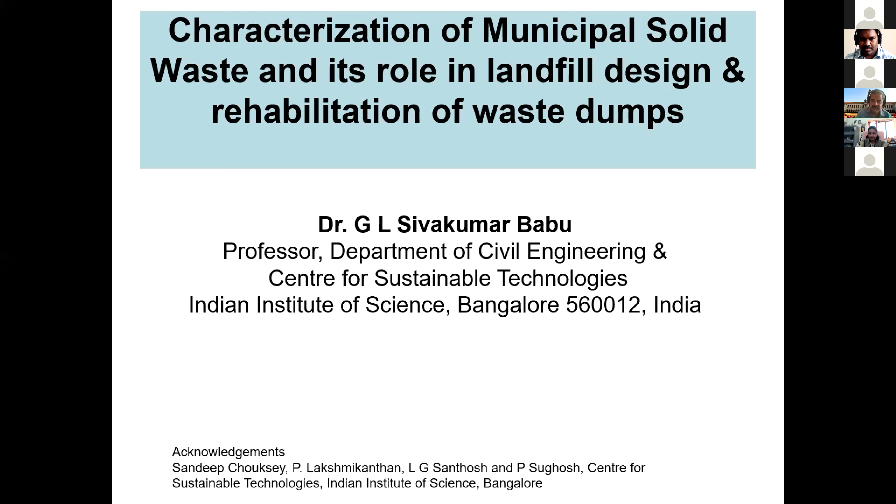I will be talking about characterization of municipal solid waste and its role in landfill design. Of course, we don't have any landfills in India; a lot of dumps we have. So we really need to use this knowledge in the rehabilitation of dump sites. We have been working for quite some time on this. We have the contributions from Sandeep Chouksey, then Lakshmikanthan, then Dr. Santhosh, Dr. Sughosh, and others. I just want to talk about the importance of the topic, then the state of practice, perspectives, and all of that. If you look at the Government of India guidelines.

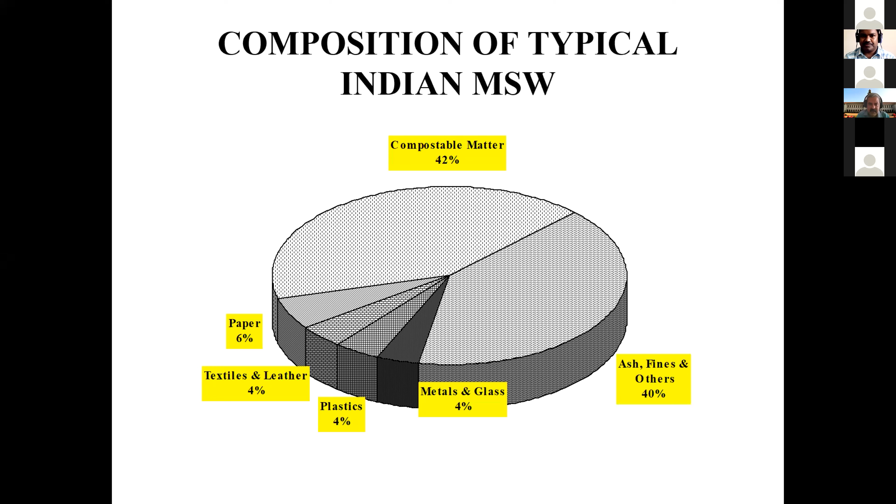So thank you, sir. Yeah, so if you look at the composition of the solid waste that is given in some of the documents, the waste characteristics are completely different in India from any other country. Compostable matter is about 42%, and paper, textiles, ash and fines and others. You get this number, but actually we are trying to look at the data that we have in Bangalore. So the numbers are similar. Say, for example, the biodegradable waste is in the same range, and even others are there.

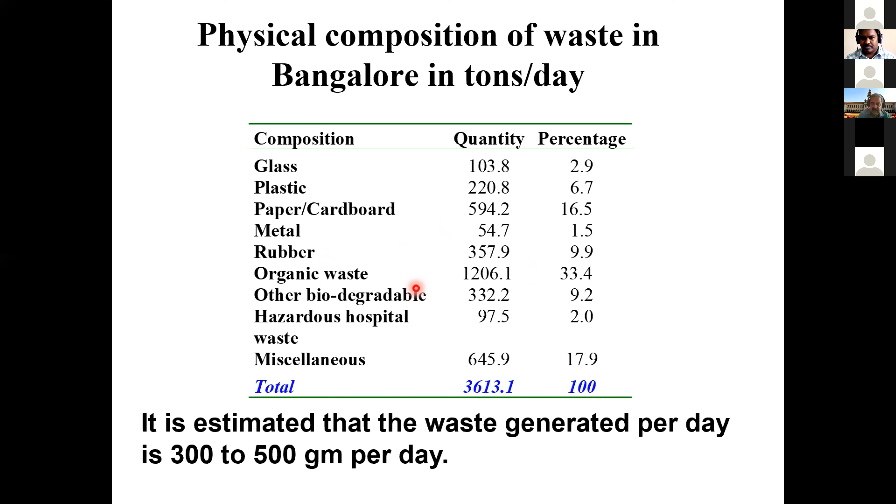There could be some variations, and we also know that there could be about 300 to 500 grams per person per day. This is one number that we need to know for the estimation of landfill capacities.

I was just looking at the Government of India statistics, which says that you have a lot of waste generated, and many people are tending to migrate to cities. According to the Pollution Control Board, more than 1 lakh tons of waste per day is generated, and of course they say about 100 grams per person per day, and the efficiency of the processing is quite low. That's what I see most of the time.

And that way, what is supposed to be treated in landfills is actually dumped elsewhere in the cities or villages, or even outskirts of the towns and villages. And it leads to quality of life being very poor. And some of these important aspects like source segregation and collection are not really okay.

And Bangalore generates quite high. In fact, now it is about nearly 6,000 tons per day. And the collection efficiency is also not great. I mean, I'm seeing the way that they do.

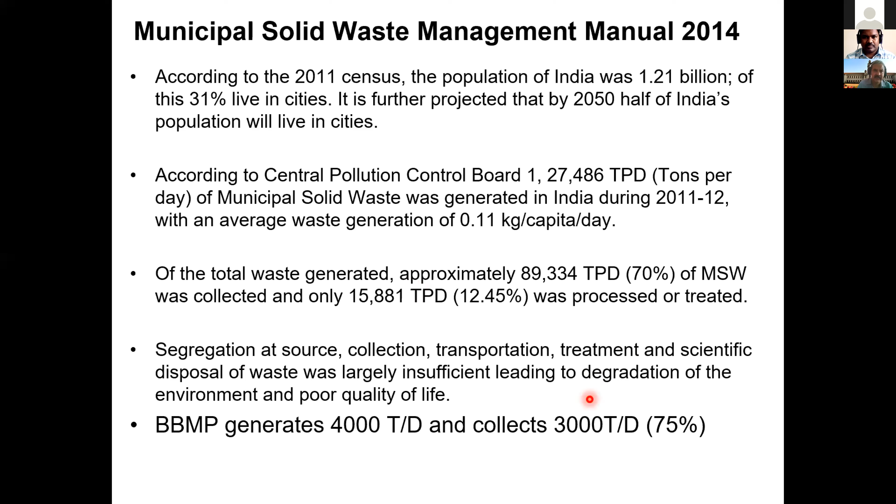And if you look at the municipal solid waste guidelines that the Government of India has, it talks about all of these options, like source reduction and reuse, recycling, composting, because we have a lot of organic matter, and we also talk about waste to energy plants and all of that,

and landfills. So though we say that the landfills are the least preferred, since the first two, source reduction and all of this, are not really very good, everything goes to landfills. But then we don't have landfills, we have dump sites. So that is a very sad part of it.

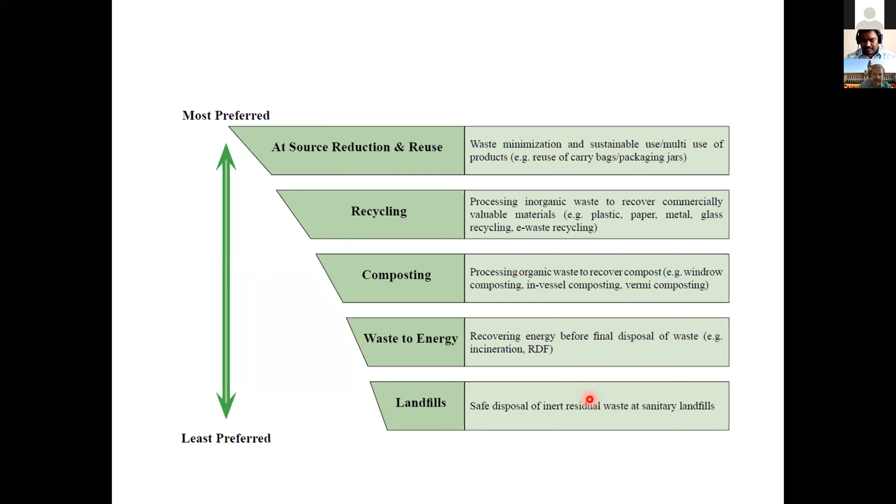Of course, we know that landfills are very useful because we'd like to store the waste in landfills, and we'd like to minimize the impact of the solid waste, because it has a lot of leachate and it has methane generation potential. So we'd like to isolate the waste through containment, and eliminate the pathways of pollution, for example, air pollution and water pollution.

And the landfills also enable the controlled collection and treatment of products of physical, chemical, and biological changes within a dump, both liquids and gases. And why do we do that? We would like to see that all the environmental processes, like the degradation of waste and leachate generation, become stable. Whatever you want to do to treat them is okay, but at least the whole operation is stable.

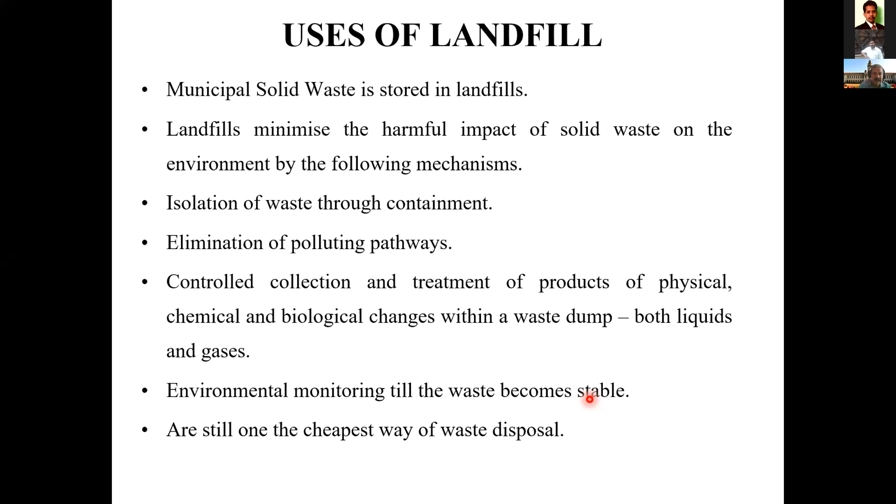And it is supposed to be one of the cheapest ways, definitely, because nowadays at Government of India level, people are talking about so many technologies. When you talk about landfill configurations, this is if you really start from zero, but unfortunately we don't have those conditions. Maybe in some towns they still can do that.

So you have area fill, where you try to treat the surface in a proper way and then construct an area fill, or sometimes above ground or below ground, depending on the geological conditions. If the water table is deep, you can go somewhat deeper, but if the water table is somewhat high, say 7 or 10 meters, you can't really go to that, so you can go a bit down and then go up. So this is like above and below.

And of course, valley fills, this is what we have in Bangalore. This is a big problem here. Nowadays a lot of quarry sites are there in some places, and they are placing the waste down in these sites. But the technology of landfilling in valley sites is very, very complicated. It could lead to a lot of problems of leachate treatment and all of that.

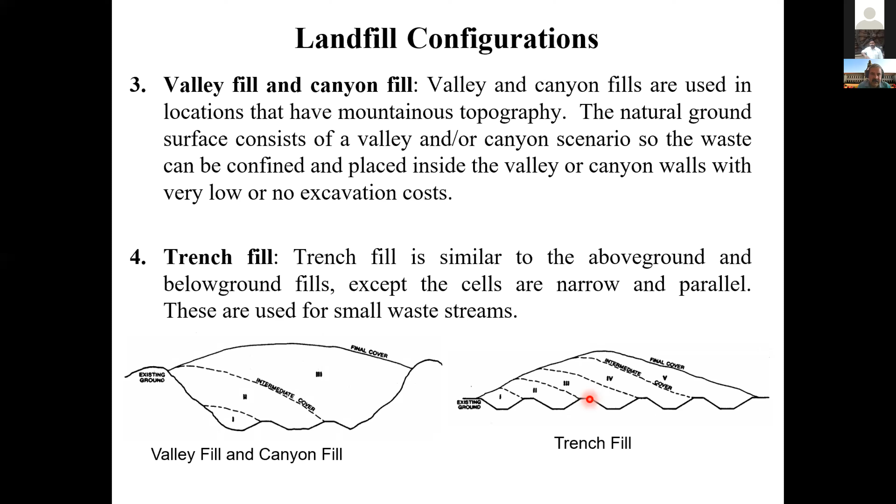And trench filling is also there. So there are some options. But then it basically comes down to geological considerations, the quantity of waste, economics, and so many other things, the politics as well.

So if you look at a plan, the way that we design the landfill would be that suppose you have maybe 8,000 tons per day in Mumbai, or 6,000 tons per day in Bangalore, and we need to have a design of say 15, 20, 30 years or something.

The higher the life, the better for us, because we don't need to worry about where to place them. So you can even put it in the plan view, where you can just phase out the waste collection. Initially you need to acquire the complete site and then start with phases, where phase one could last for a few years, 3-4 years, and like that you need to control operations.

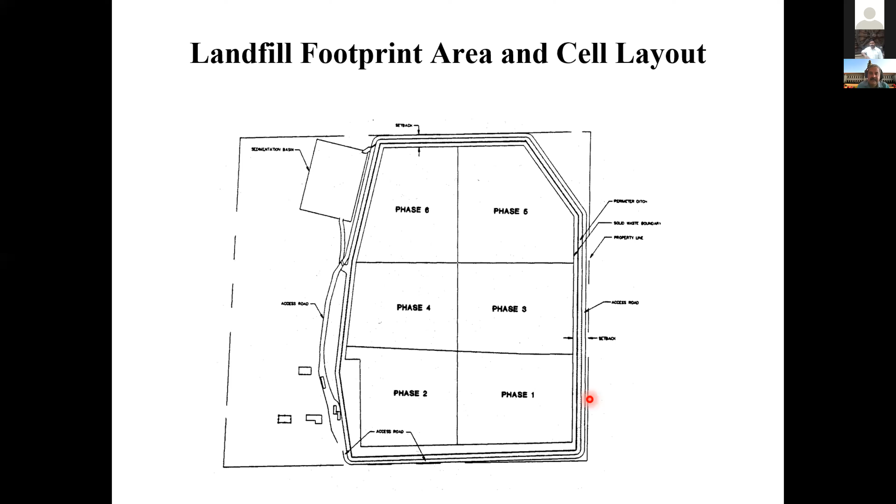As I was just mentioning, landfilling is a controlled operation. You need to understand what goes in and what goes out. That is, in a way, some understanding. But in India, we don't have that. People simply come and dump. They don't have any scientific understanding of the whole thing, including the government units.

So, of course, we have a liner system at the bottom, because we don't want this material to be in contact with the native soil. So you put a clay liner, then the geomembrane, a leachate collection system, and all of that. I think you have nice lectures on the design of liners, and you also have covers: once it is completed, you need different types of covers, like daily cover, intermediate cover, and final cover.

So you need to look at waste, and then you need to have an infiltration layer; this is a basic thing. But definitely you need geotextiles or other better materials. For example, in the cover material itself, there are so many options, and I think Professor Reddy or Professor BNS would be talking about how to reduce the methane gases going out of this cover. Even the current guidelines of the Government of India do not really address these issues of methane migration.

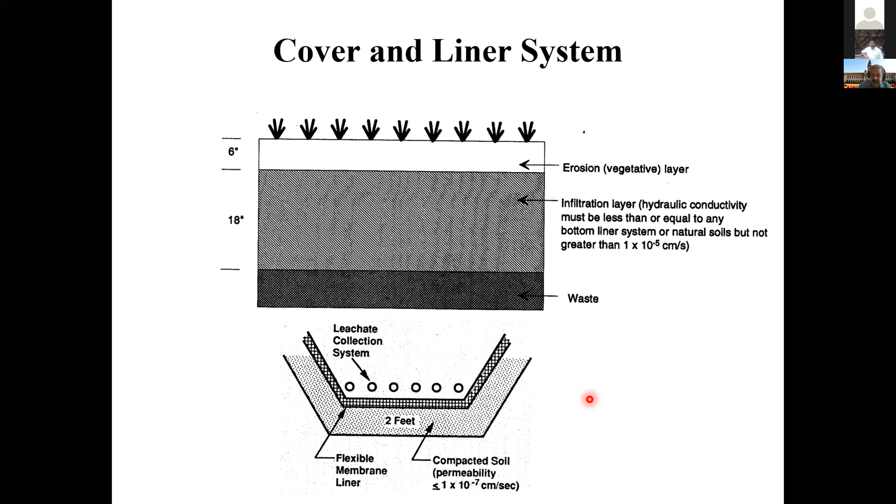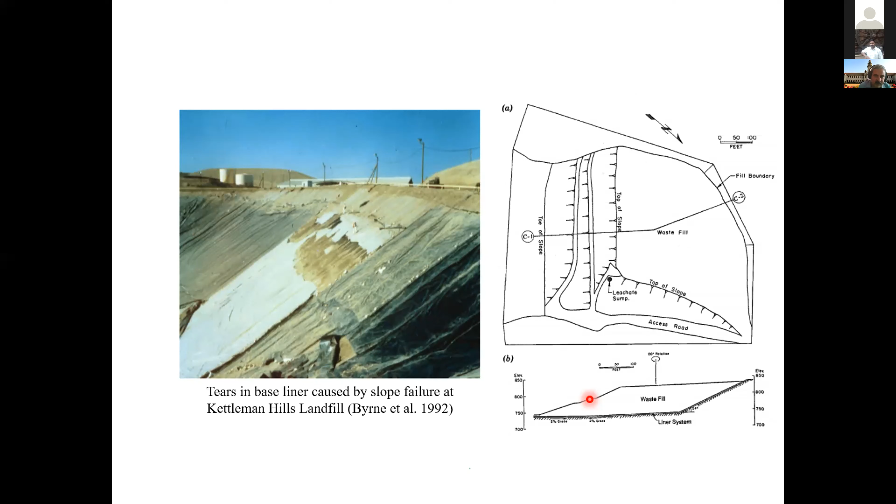And I should also tell you that in India the landfill system itself is a flop, a total failure, and nobody studied it. Only 3 or 4 people like Professor BNS, a few like me, are trying to work on it. The kind of disasters that we have in India with landfill dumping are a total failure of the system. It needs big forensic engineering itself. I've been seeing these failures in India, particularly in Bangalore, but I'm just putting some international photos.

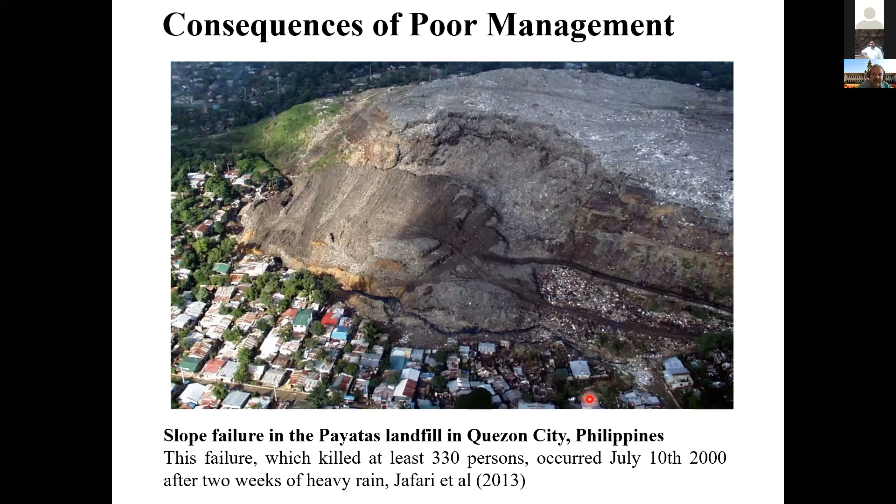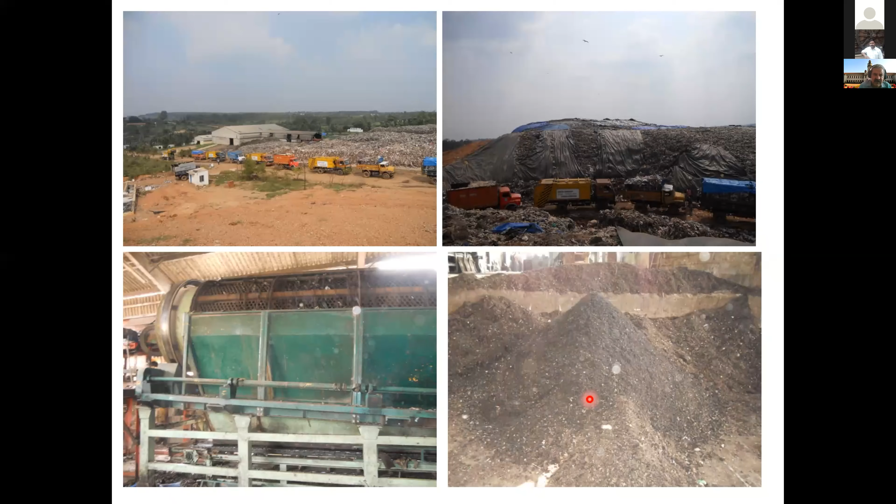Some time back, I was giving a lecture to Bangalore engineers, and I showed them that there was a dump failure in Mangalore recently, maybe 2 years back. You can see some of the officers walking around. This is the Pachanady dumping site. You can see a lot of methane gas, and it is in a green area. This is the way it failed. After extensive rains in August, just 2 years back, it started sliding. About 9 lakh tons of waste was there, and it caused damage of about 9 acres.

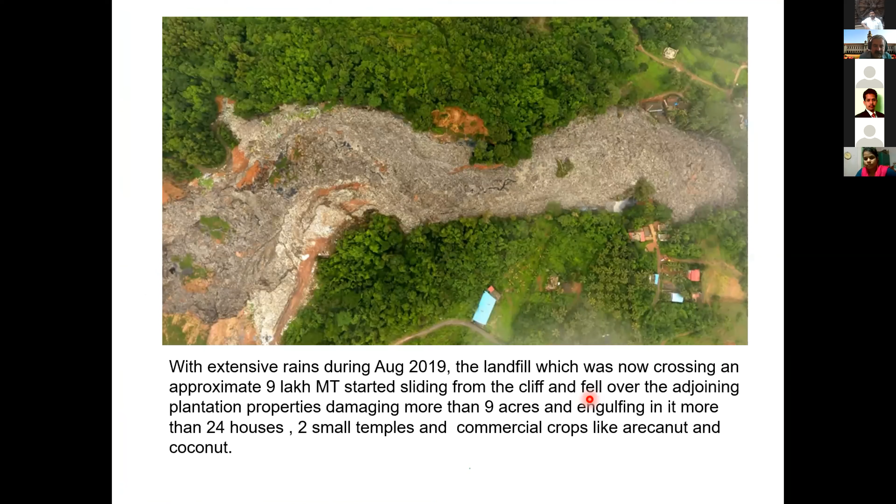And it has so many problems. It led to so many issues and all of that. This is supposed to be in a place which is supposed to be very good in engineering, and you can see a lot of green areas around it. And of course in Bangalore, in Delhi, we have this Ghazipur dump site. Of course in Mumbai you have many. I think Professor BNS will speak about that.

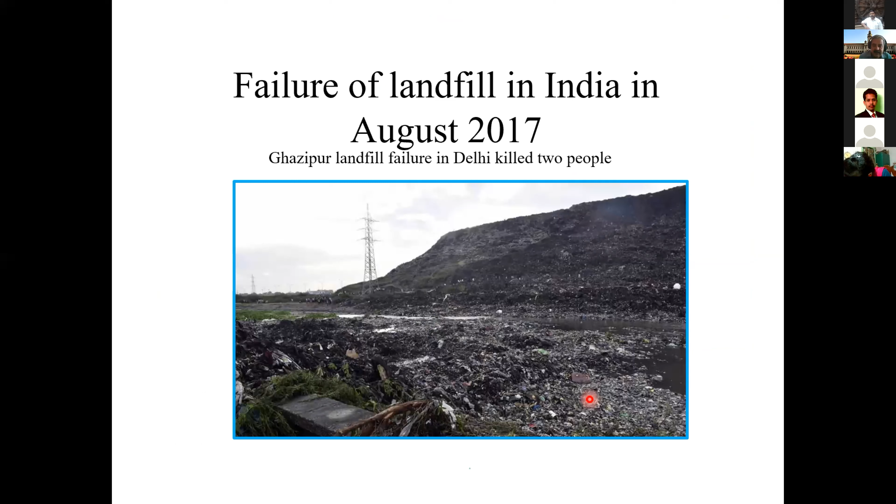So what are the issues in landfills? I think there are a number of issues that we can handle. Identification of landfill sites itself. Like, if you identify a particular site, given that the site is problematic, what is the way that it can work around? So there are a lot of issues here. One can look at this identification of land, assessment of capacities, because it should be cost effective. So assessment of capacity is very important. Estimation of waste characteristics is very important.

It's like you admit a patient in a hospital. Let me tell you, all these landfills are ICUs for all our waste. So you must characterize this waste in a proper way, then you can understand it properly. Because now since you're trying to have this containment system like liner, cover, and all of that, how well it behaves is a function of the waste characteristics. Then you have a lot of methane gas generated in the landfills, because particularly you have a lot of biodegradable waste, to the extent of 40 to 50%. So then how do you do that?

Then the role of geosynthetic materials is very important, because I have seen a lot of places, you have some 20 acres and they bring virgin soil, and then it is like waste plus soil. I find that the way they do compaction is so bad, and the native soil is used so much. Best is to use products like geosynthetic materials, which can minimize the use of natural materials. Remediation of sites is very important. This is very, very critical in our country, because there are so many landfill sites that are leading to a lot of contamination.

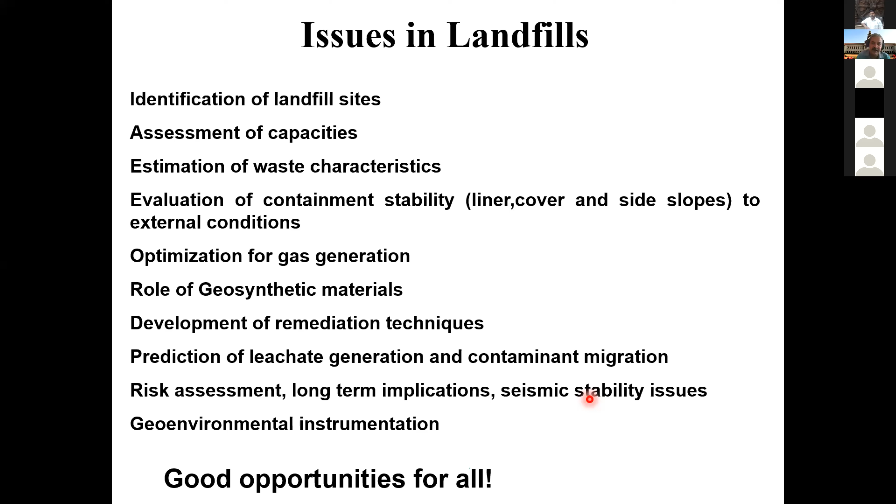Okay, so what are the physical factors? There are a lot of processes in municipal solid waste that happen because of biodegradation. We have physical and mechanical processes, because it's a highly heterogeneous particulate material: there'll be reorientation of particles, movement of fine particles into larger voids, and collapse of void spaces. And chemical processes, like oxidation and all of that.

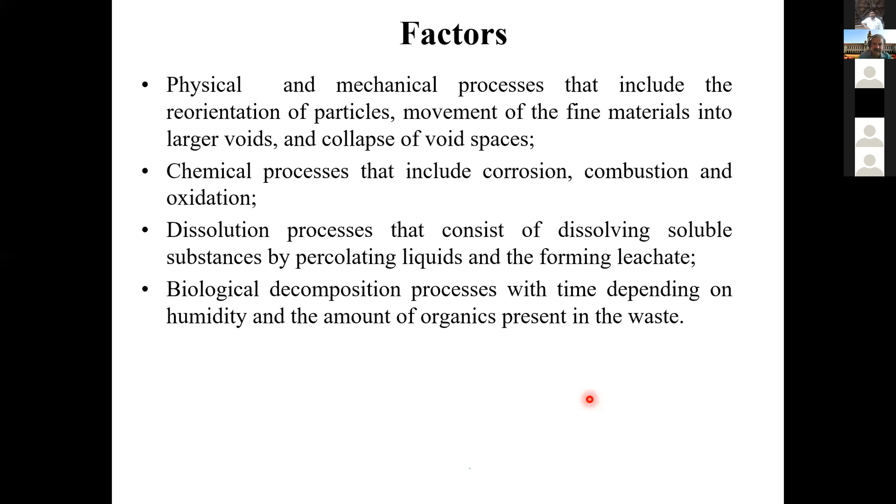Dissolution processes, because all of the chemistry is happening here. Then biological processes. There are so many processes: mechanical processes, chemical processes, biological, all of them very complex. And as civil engineers, we know about steel and concrete a bit, but then soil mechanics, we do two subjects. We talk about a three-phase diagram, and people get some marks out of it.

Many people don't like geotechnical or soil mechanics. They quit it. They go become structural engineers or whatever, right? Everybody wants to be in infrastructure, but you should understand that this is a big market here. There's a lot of opportunities, and what we are really looking at in landfills is much more complicated. Instead of the air, you have methane here.

Okay, who is that? You can ask him to stop.

Yeah, okay. So instead of the water, you have leachate, and you have biological material. In fact, there are a lot of biosolids, which have a lot of bacteria on the surfaces. So you're handling something very, very complex. What we studied as a three-phase material or continuum is no more valid, and it's a very complicated interactive system of physical, chemical, biological, all of these things. So it's a biogeo interface, people call it. Maybe others will talk about this.

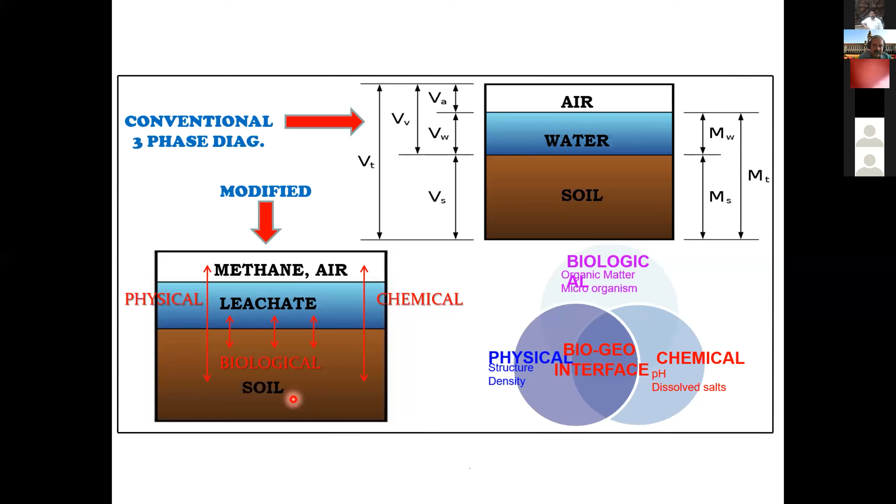When it comes to measuring these properties, what are the things that you need? You need to go for the physical composition, essentially the composition of the waste itself, by mechanical or hand sorting or whatever can be done. And you need to find out the moisture content and organic content. These are some basic things that we do. This basic characterization is also required in trying to adopt recycling options. If you know the composition characteristics very well, it is possible.

I have seen in the government of India, they just give some numbers, then the estimates are prepared based on those numbers. But it takes maybe a day, or a few hours, to actually look at composition and then give proper answers. I've been looking at a lot of the quotations and work orders. The estimates are prepared without even doing the basic testing, basic composition analysis. That is so bad in the country. So my submission would be that you should alert your colleagues in the environmental engineering departments that they should do the basic characterization of what type of materials it has and what type of recycling options we have. Something has to be decided.

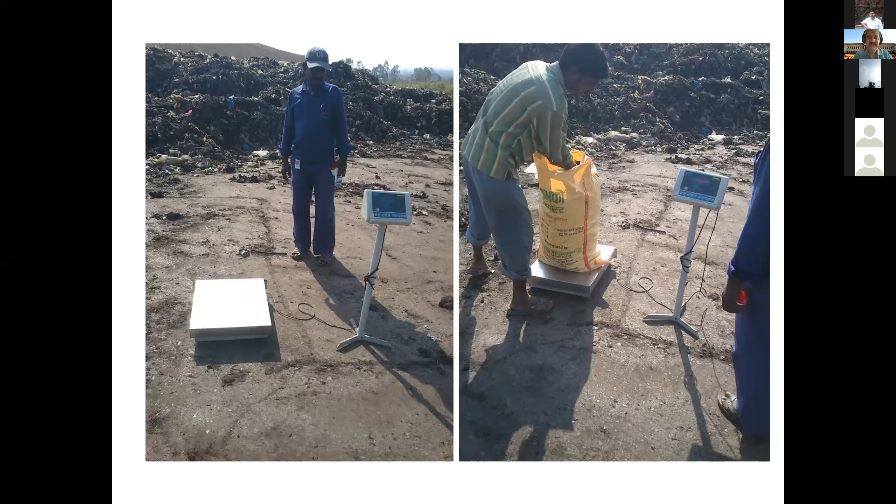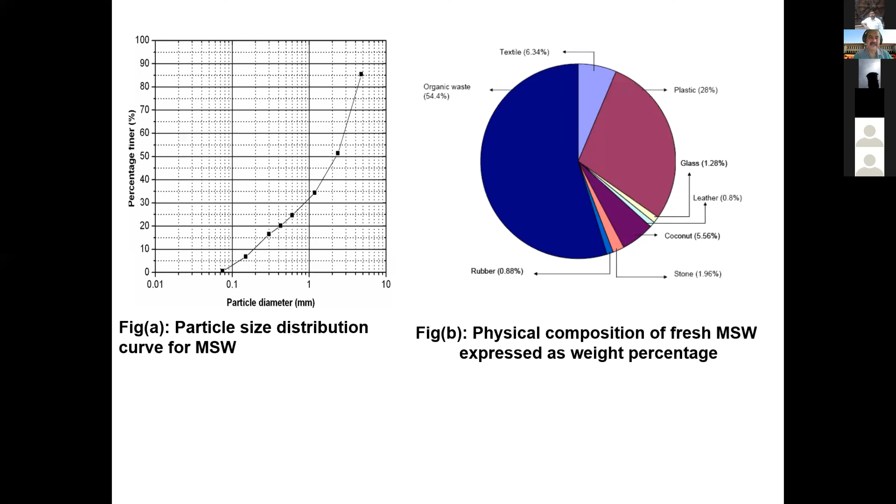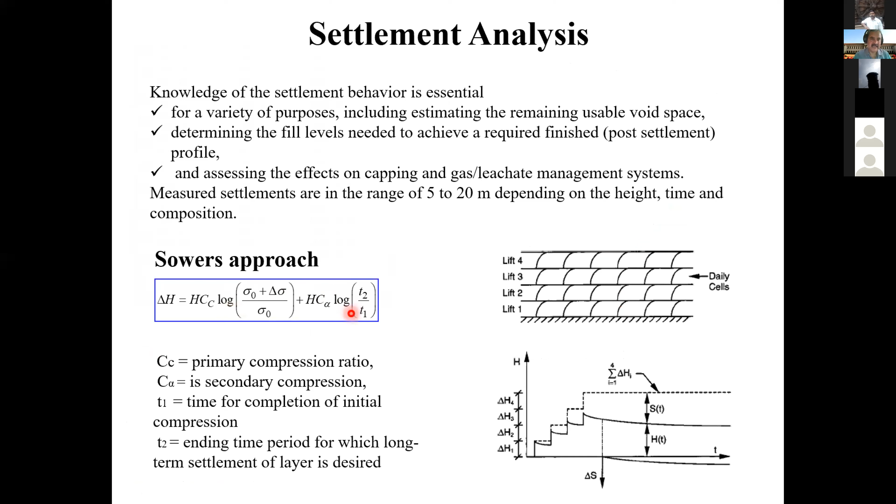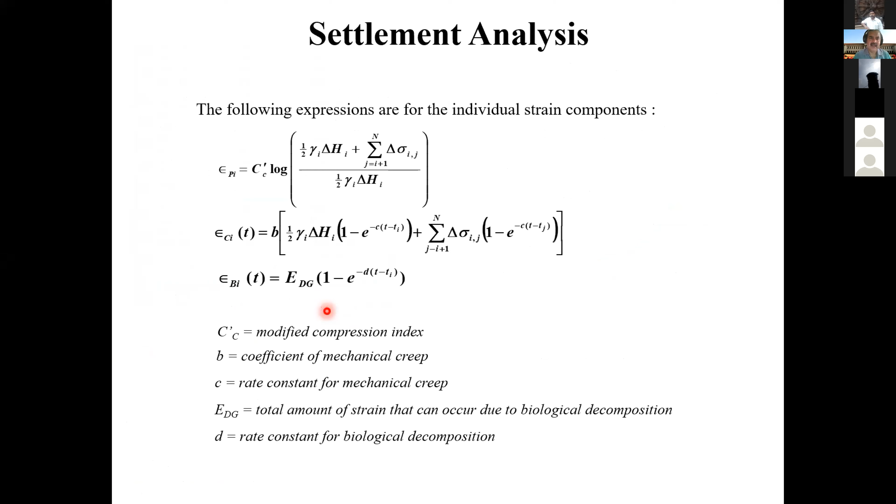So this is a particle size distribution, and this is the settlement analysis I just mentioned, where the creep and biodegradation are considered. This is primary compression. This is secondary. He combines both of them, but when the biodegradable material is more, then you need to use a better approach. There are a lot of papers on this.

Shear strength. Are you able to see the movement of the slides now? Yes, sir. Okay, fine, thank you.

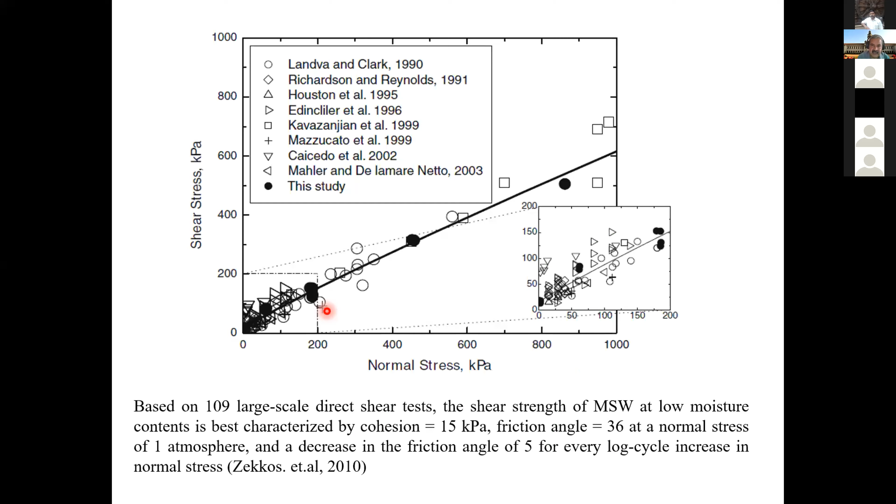So I was just mentioning that many landfill failures do occur, both in the long term, like where there is a geomembrane and there is a failure, which we call a drained failure, and after rainfall. We have seen so many failures in India as well as abroad. We call them undrained failures in geotechnical terminology. But we don't have a proper understanding of this. That's what I want to say. So we did some tests, a consolidated undrained test and drained test.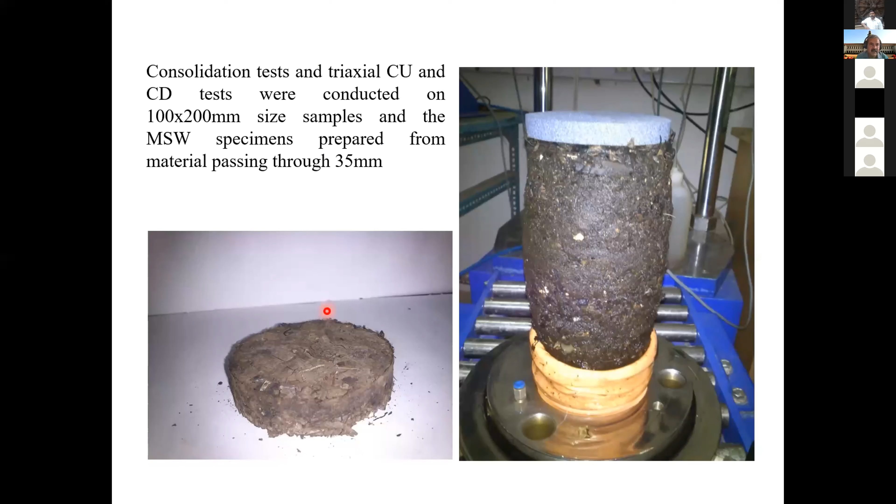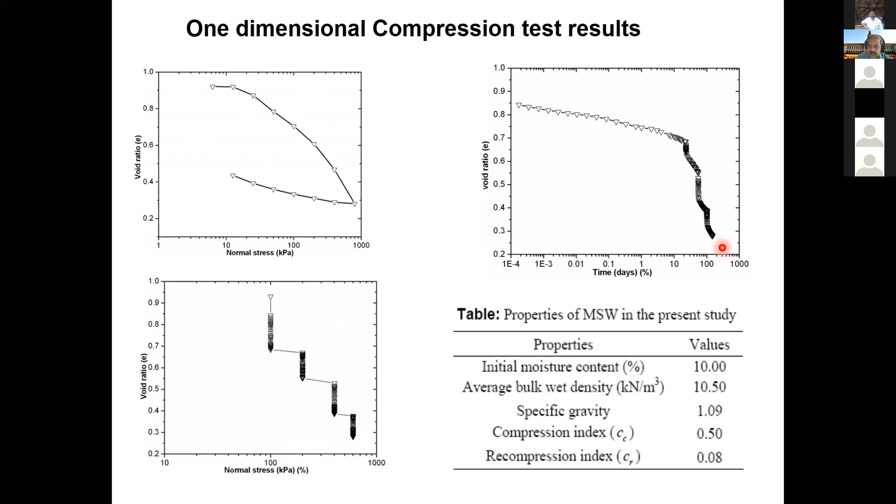We can see the sample size is quite big, and the height is 20 centimeters by 10 centimeters. We also did creep compression tests and creep tests for not less than 1 year or so. You can see about 1 year of tests at various creep levels. We are trying to find out the properties, to get the sustained response under undrained and drained conditions. So it's all very interesting.

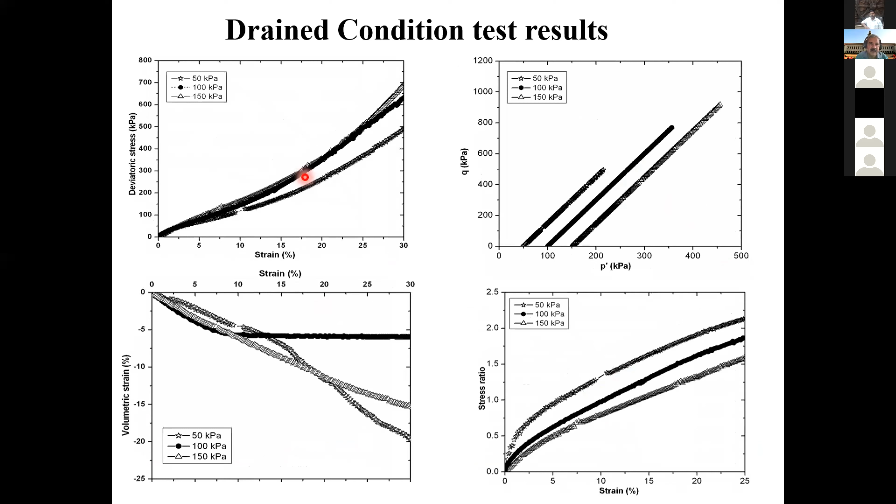We're able to see good results, but at the same time, we wanted to develop a proper model. Looking at c and phi is all right, but it will not answer everything, because with cohesion and friction we don't know what happens with biodegradation and with time. A conventional geotechnical engineer only thinks about c and phi, because for him that's life. But in municipal solid waste, there are so many other factors influencing the shear strength response, stability, and settlements.

So we used what is called a modified Cam Clay model, which was developed to account for this, and we are able to get very good results. We even used data from Brazil, and data from Prof Reddy. In fact, I must thank Prof Reddy because some time back we had a discussion on this. Then I started working on it, and we found the model very necessary and useful.

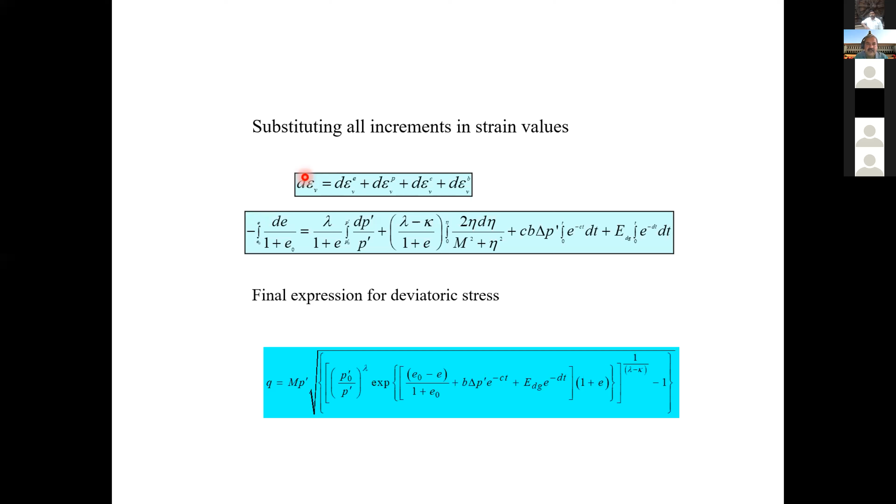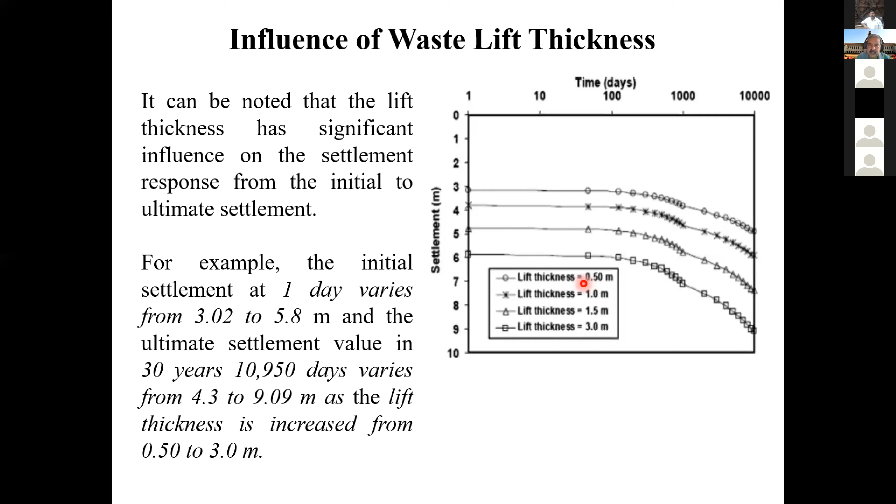It was able to answer things like lift thickness. A lift thickness of 3 meters is basically a dump. If you have just dumping alone, the settlements could be large, whereas with a compaction lift thickness of, say, 0.5 meters, the settlements could be less. We want ultimate settlements to be very, very small in a landfill, so that the material is well compacted.

These are all the stress-strain responses that we predicted due to primary compression and creep. What happens to the strength of the material as a function of biodegradation? We're able to follow it. Due to biodegradation, the void spaces get closed. In the literature there is a lot of confusion with respect to this concept, but these things can be reasonably understood better.

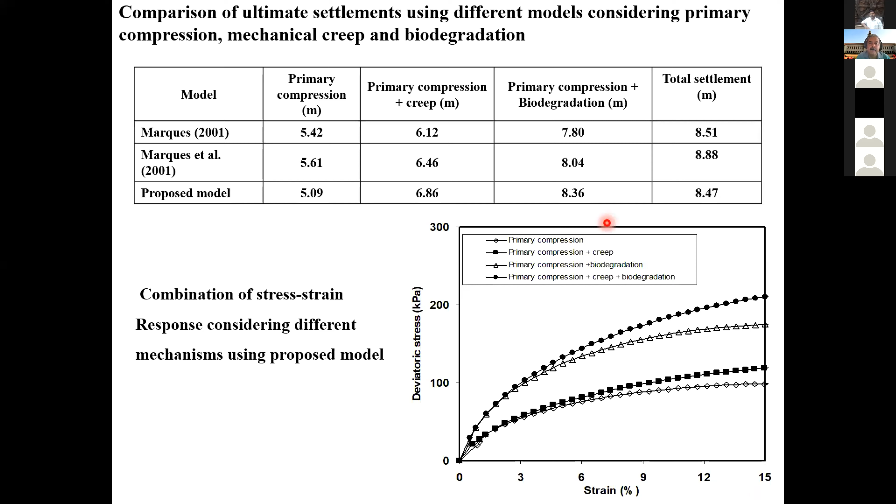One more thing: say you have a typical dump of 5 meters, which is a small fill. We're trying to estimate the primary compression as well as strength. Why is it required? The models that we have are only one-dimensional models for settlement and shear. Since the issue is three-dimensional, we need to really look at it, and we did that.

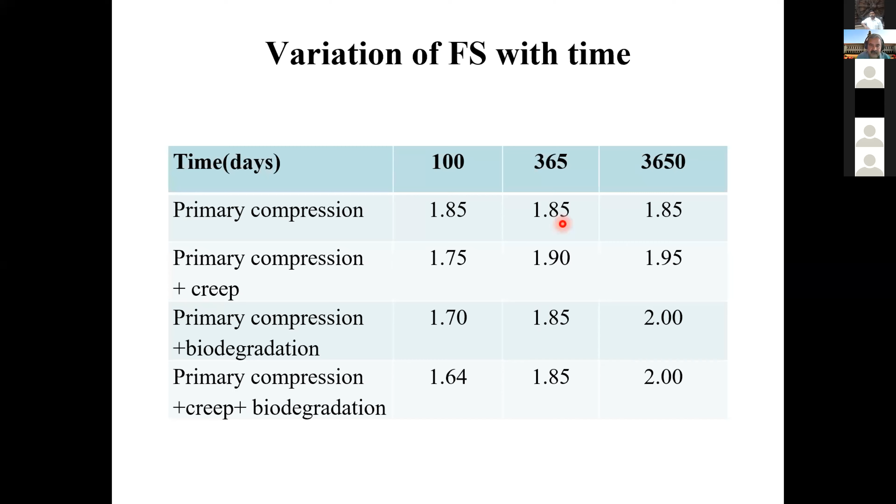You can find out how the factor of safety varies as a function of number of days, or even compute the settlements, vertical deformations and horizontal deformations. And you can see, with a 5 meter dump or any dump, after 100 days there'll be extra volume. So you can calculate the extra volume, original volume, net volume, and new volume. The volume change that results can be used gainfully to understand what is happening.

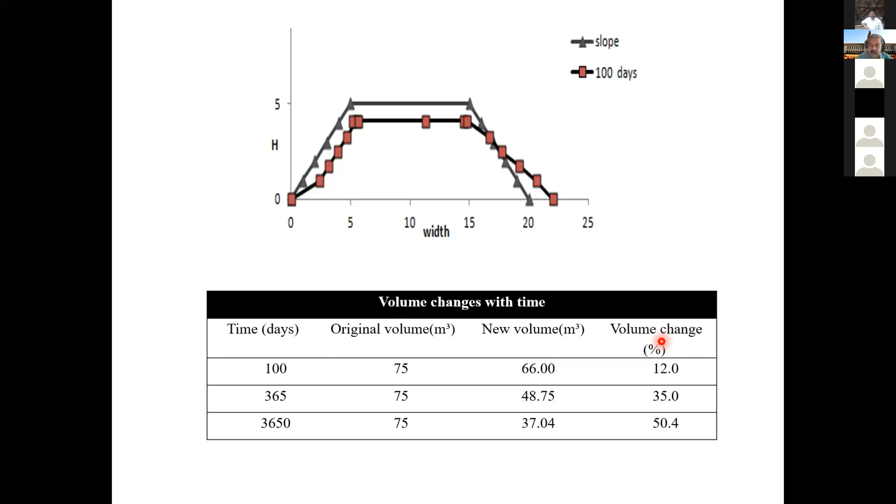Nowadays, the government of India is looking at smart cities, and people working on smart cities talk about waste as one of the key sectors, apart from energy, healthcare, and water. Unfortunately, there is no understanding of the whole thing. The way we want to do it is that the landfill can become smart in terms of its leachate generation, gas generation, and contamination potential. If you're able to do that, it's good.

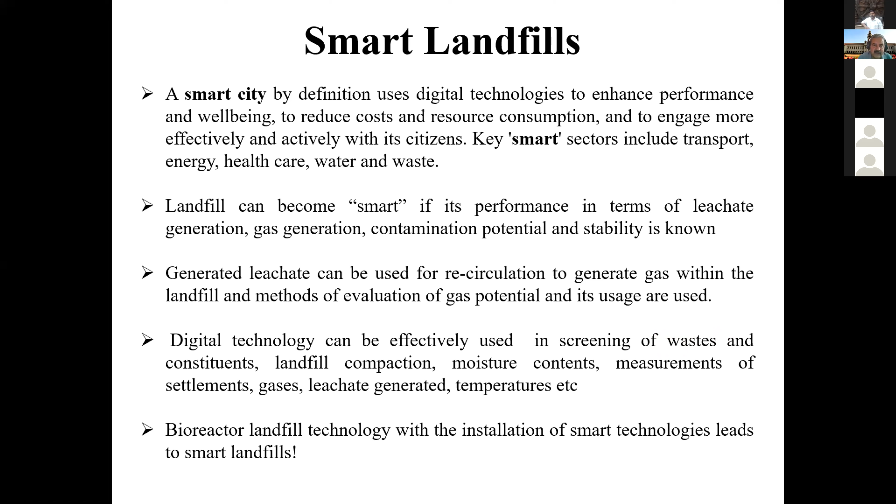The leachate generated could be used for recirculation. We'll see that later; I think Professor DNS will be talking extensively on that. Digital technology could be used effectively in the screening of waste and landfills. There are a lot of advantages to how digital technologies can be used. Of course, bioreactor landfill technology can be modified to suit our own rehabilitation needs. I will not cover this because Professor DNS will be talking on it.

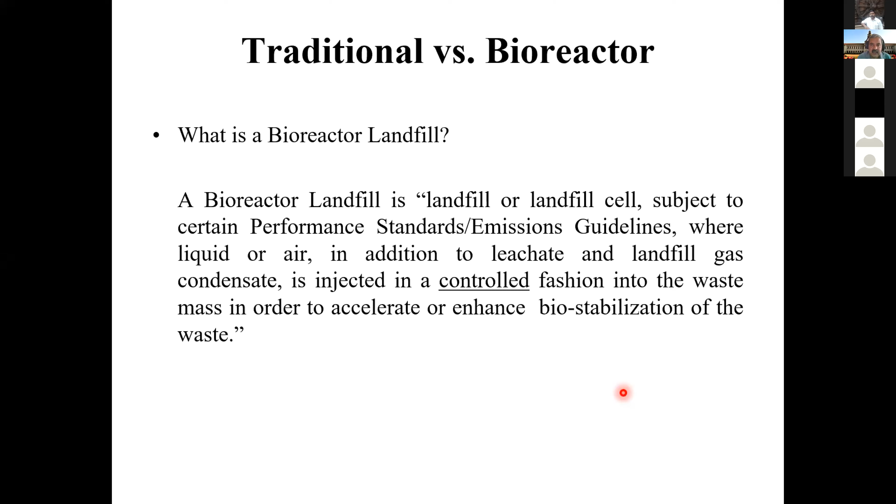So essentially what we are trying to do is, the landfill or a dump site is already there, you can't do much there. But if you add leachate into the landfill in a controlled fashion, it helps to accelerate or enhance the biostabilization approach. That's what we can do.

And the advantage would be that in the case of normal dry dump sites, it's a slow decomposition of waste, inefficient and incomplete decomposition. Here the overall behavior of the landfill is predictable. As I just mentioned, if you have a lot of measurements, like how much leachate is being pumped in and what gas is coming, things become much more predictable. So that we want to have.

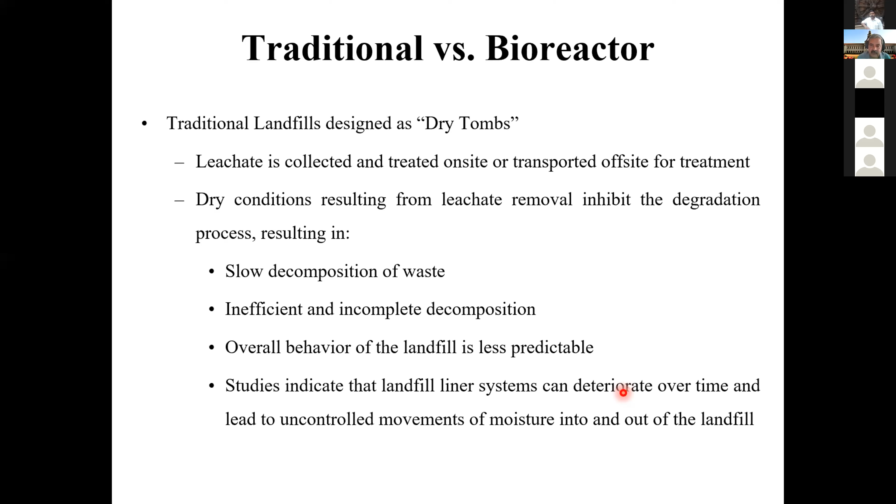Even we don't know the life of some of these liners because they can deteriorate with time. For example, I can give the example of filters. You design filters in landfills, but I'm sure that they will not work beyond 3-4 years. And we are trying to assure a period of 100 years or 50 years here. So there could be a lot of clogging and other effects.

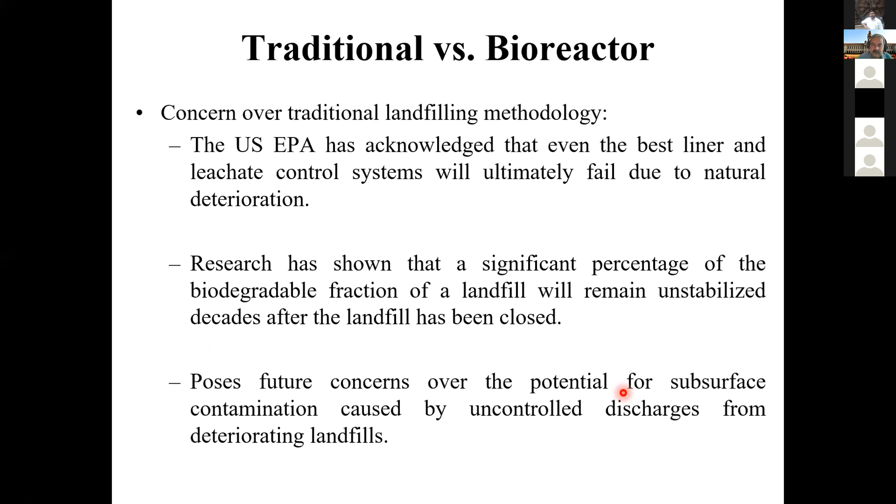So of course, this bioreactor landfill is being promoted in some sense, but we don't have practical examples. We are trying to work in Bangalore and we have a big project on its use. We have taken some 2-3 sites where they called for this approach to be used. And we have been working with some companies where you can monitor the landfill gases, settlements, then put the wells, vertical wells, horizontal wells, and all of that.

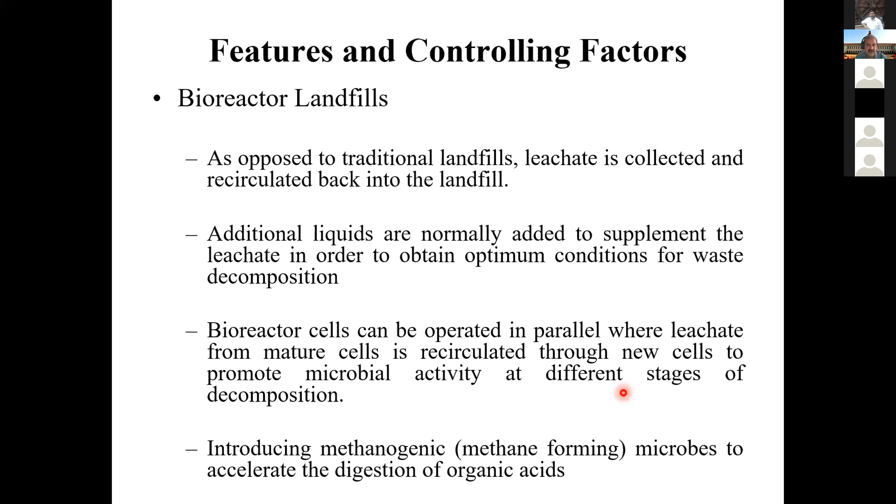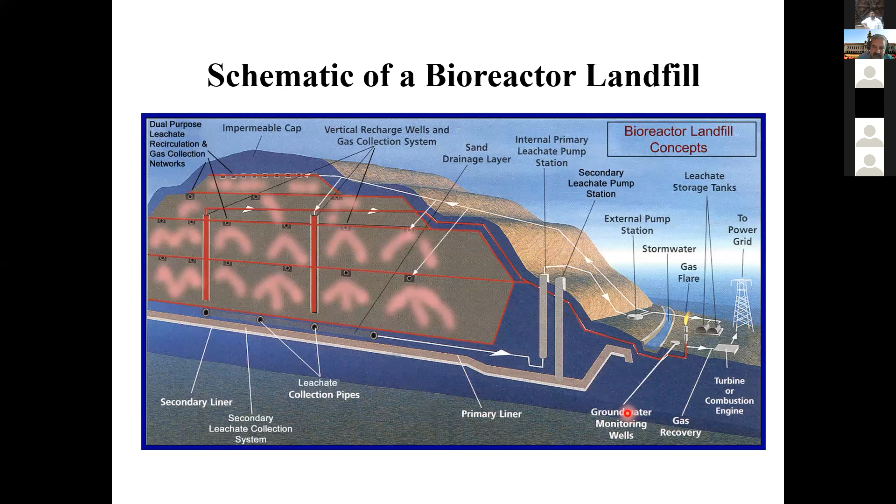So this is a typical system that you are going to have in a bioreactor landfill. You have vertical wells, you have horizontal benches, then you have a reactor system, then try to monitor all of that. And this is all well established. So the benefit should be, definitely, the landfill stabilization.

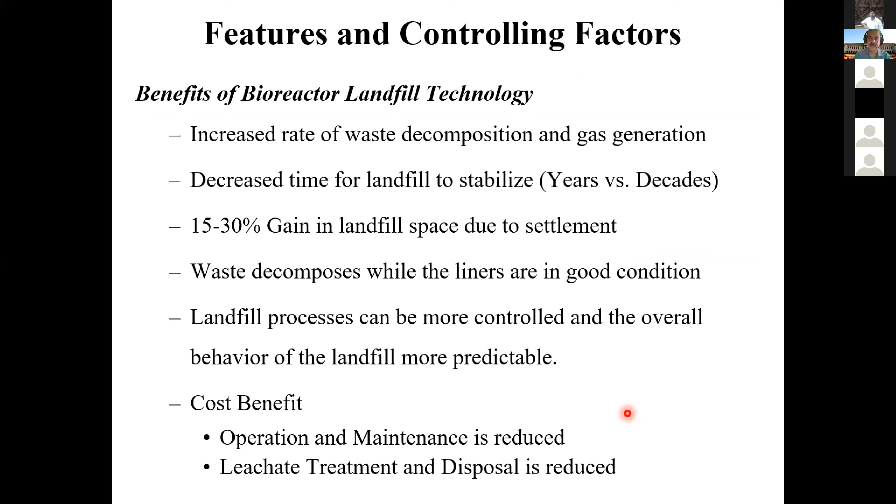In fact, when I took the data that we have for Bangalore, I was telling them that within 3-4 years you can stabilize this area. In Bangalore, we have 300 acres of dump sites, and I told them that we can recover them in 10 years, factoring in all the processes. And 300 acres in a prime area in Bangalore is quite expensive. So I was just mentioning that you can remediate these sites.

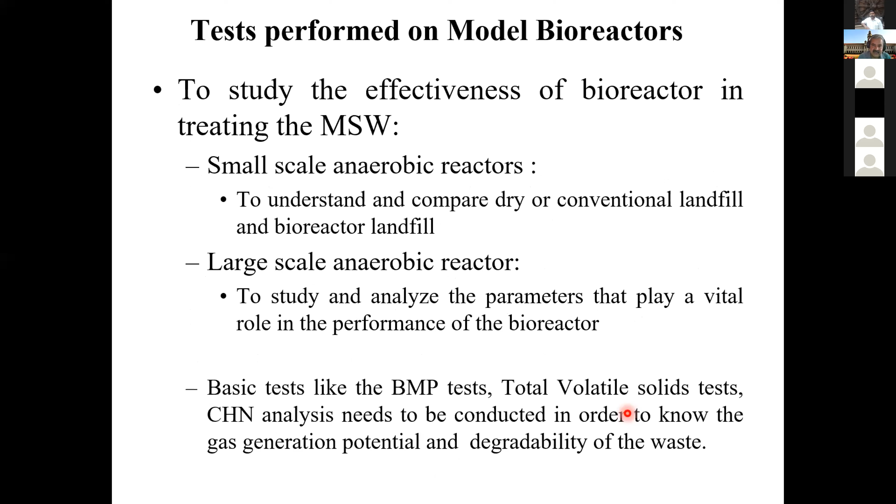The confidence came because we did different types of reactors in the lab. We did tests like biomethane potential tests, the total volatile solids test, CHN analysis, and all of that. We started with simple cells, trying to understand what happens, and to understand the compressibility behavior and gas generation potential.

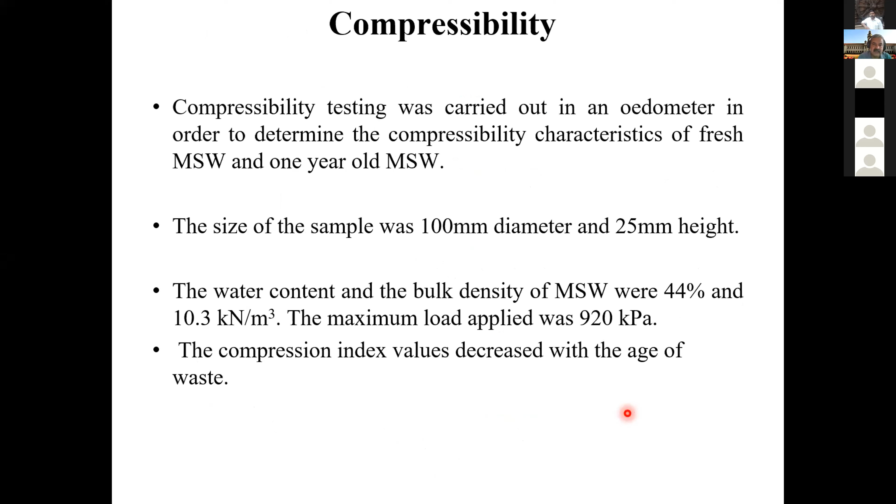So we take the initial MSW, compressed as it is or dry, as supposed to be in a normal landfill, or in a bioreactor landfill, and see what happens. So we're trying to measure or estimate the compression properties and all of that.

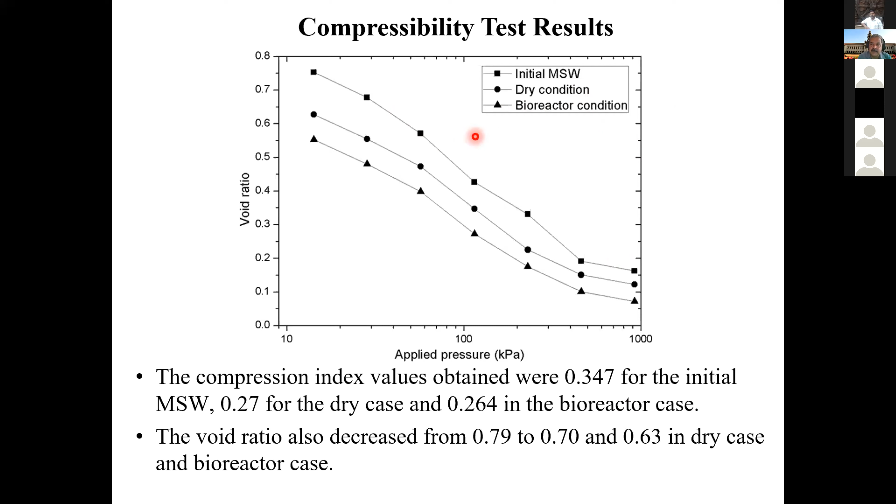Even the gas, this is another interesting result that we were able to measure for 1 year, because to convince others, particularly the local people, they have a way of saying, oh, you did it for Mumbai, but why Bangalore? These are all simple, cynical attitudes.

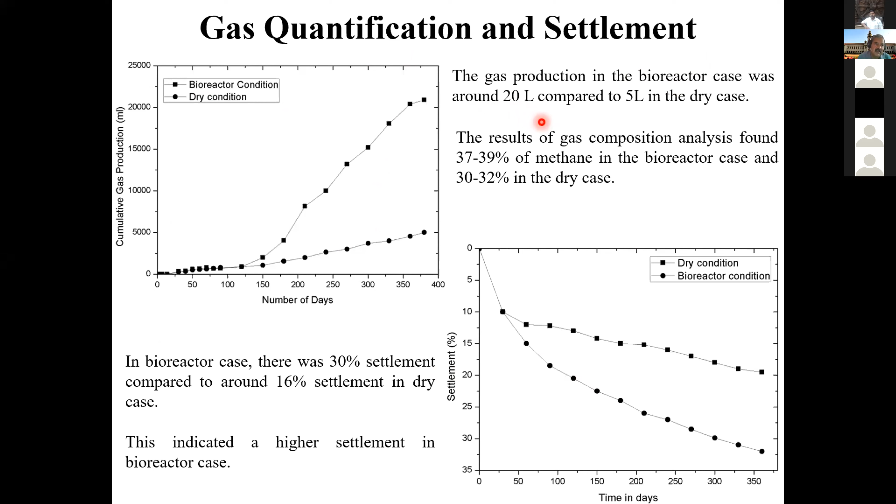So I was trying to show them some results. You can see that the gas generation is quite good in a bioreactor landfill, and even the settlements are quite faster. For example, in a small experimental setup, we have 20 liters of gas as against 5 liters in the dry conditions. Even the CHN analysis was given, and you can see that the carbon comes down much lower.

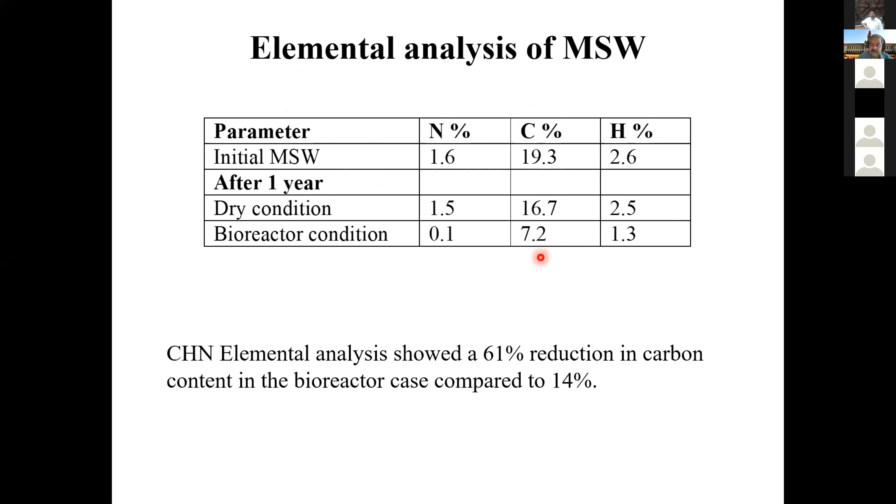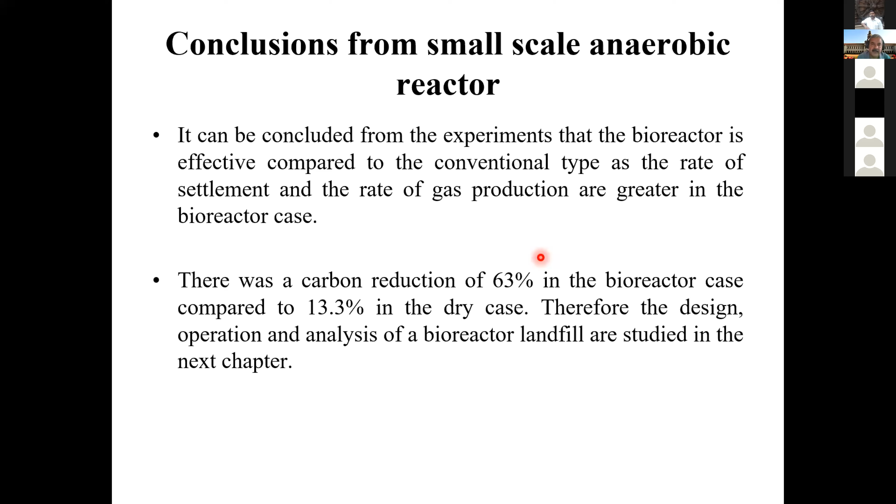Dr. Lakshmikant, now a scientist at NEERI, did extensive work on this. Now he's actually working a lot on this, which is very good.

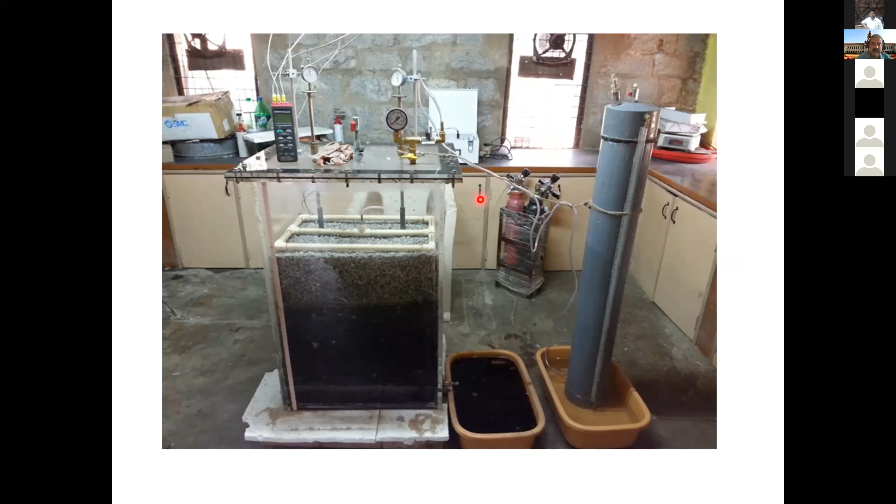So these are some temperature variations. Of course, we are now trying to measure in the dump sites. They have sanctioned a lot of money for this. I could manage to talk to the government and then they could release the government money. But now COVID has put a lot of things on the back burner. And still, I hope in the coming months we are able to start this work.

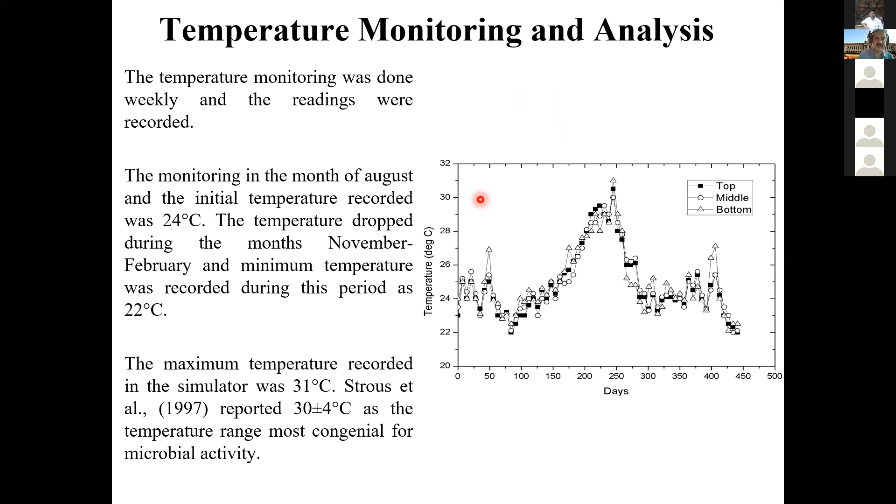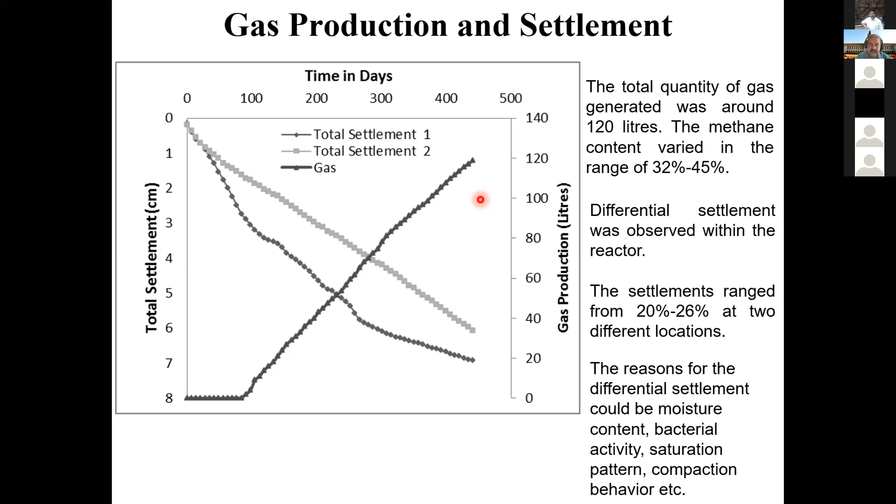We have been working on it. Quite interesting results we have. But the only thing is that, as we just discussed, these technologies need to be used in Indian practical site conditions. Initially you need some understanding. That's where the properties of all of this are required, because you need some sort of calibration and updating information in the field.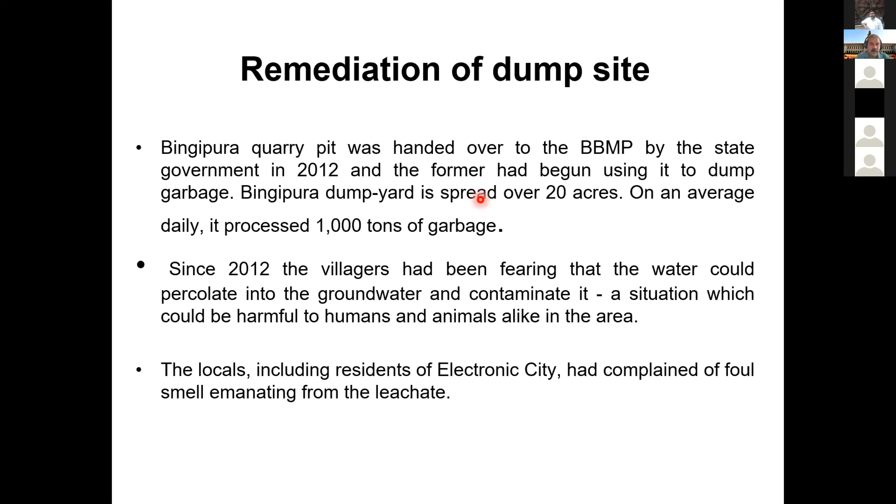It is actually close to a National Park also. We have the Bannerghatta National Park. There should be a picnic spot. So they were trying to cover this waste. Then I had to intervene, and their plan was to construct houses for the urban poor. I told them that you cannot have houses for the urban poor on this, because the water is contaminated and the soil has methane.

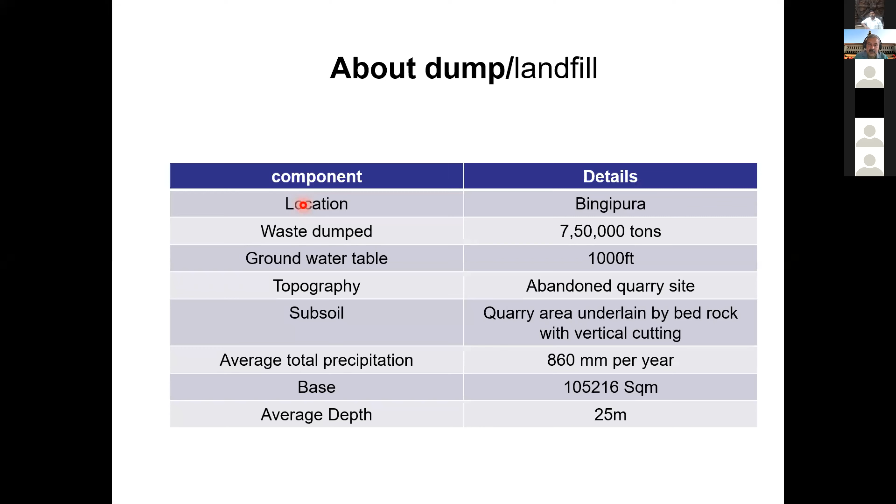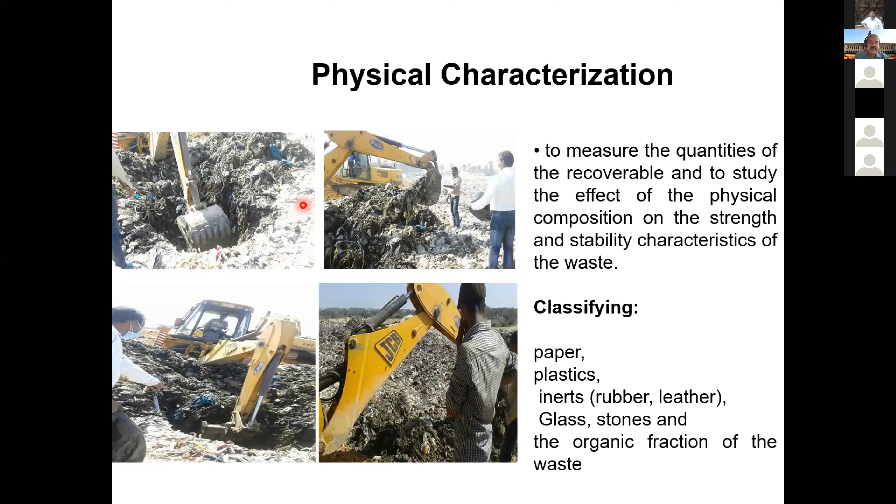I tried to characterize this waste, and again it was quite challenging. Unfortunately, we don't have sampling methods for waste, and the technology is very poor. The geotechnical investigations themselves are very poor in the country. How do you expect them to do very well here? I had to appoint somebody to do this, and he had a very tough time. In this 25 meters deep site, the leachate was at the 2 meters or 3 meters level.

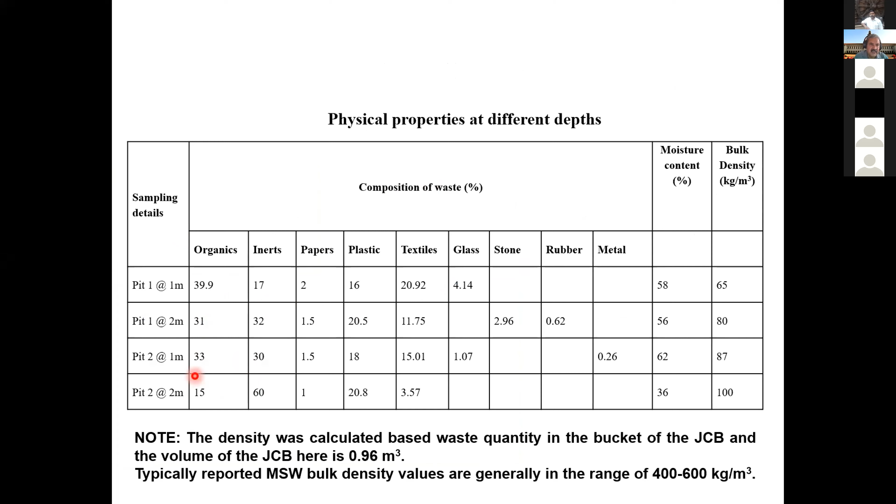We have measured all the organics. You can see that there is a degradation of about 40%. There is some 30 to 40% organic content. And the leachate characteristics are there. Then the government approved rehabilitation of the site. Some funds were allotted, but as usual, I was trying to see if any technology or people were available to do this. It was very difficult to convince people to undertake this work, because it's a risky thing.

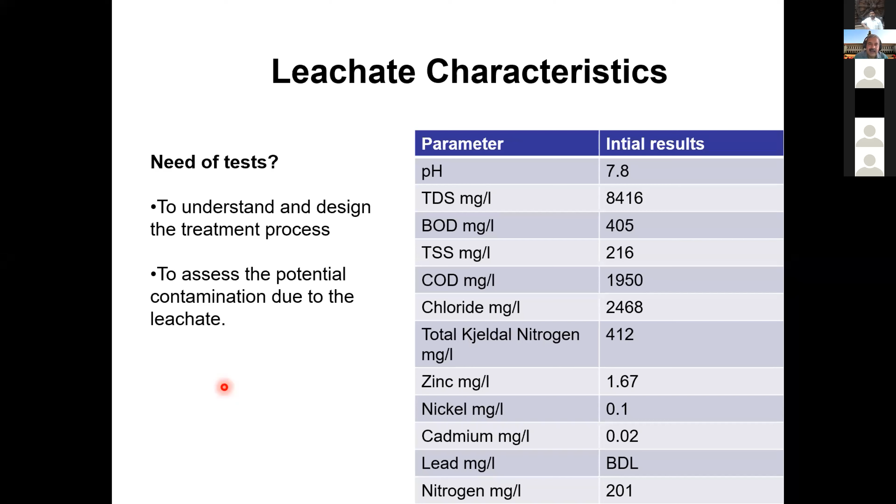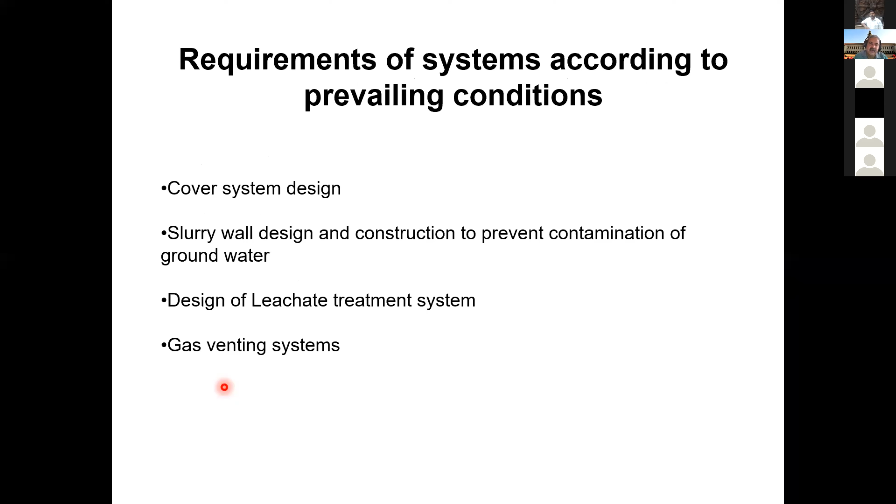So we designed a leachate collection system, leachate treatment system, gas venting system, and slurry walls, because it's contaminating the nearby water body. All of that we did. So this is the way it is, and the slurry wall is about 26 meters depth.

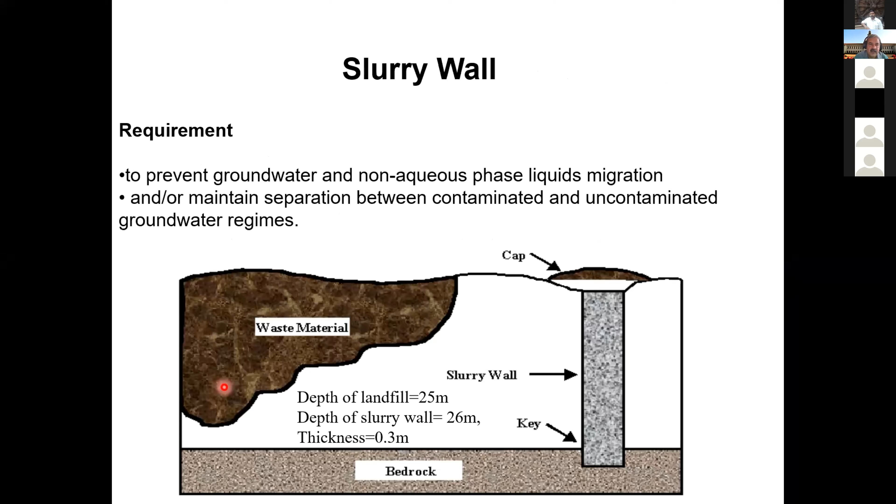I just want to conclude, because I want to give some time for discussion as well, and I'm very happy that Professor Krishna Reddy joined. As I mentioned, we started working long back, and he has been very motivating for many people in India.

So I think definitely, as waste generators, we have a lot of responsibilities. Particularly the engineering community, we need to really push our local bodies and the government to look at this polluter pays principle and try to understand all the implications of reduce, reuse, recycle, and all of that.

And landfills, of course, in some towns now people are looking at landfills. But the problem is that a landfill is a technology, and for a population of 5 lakh or 10 lakh, I don't know whether it is worth it. So one needs to really plan well and then do well, because it's not easy. Maybe for bigger cities it may be all right.

So they have to, and that's where we can contribute. If you have these options of recycling, reusing and all of that, they are much better. And wherever there are contaminations, there are a lot of technologies that we have in the Indian context.

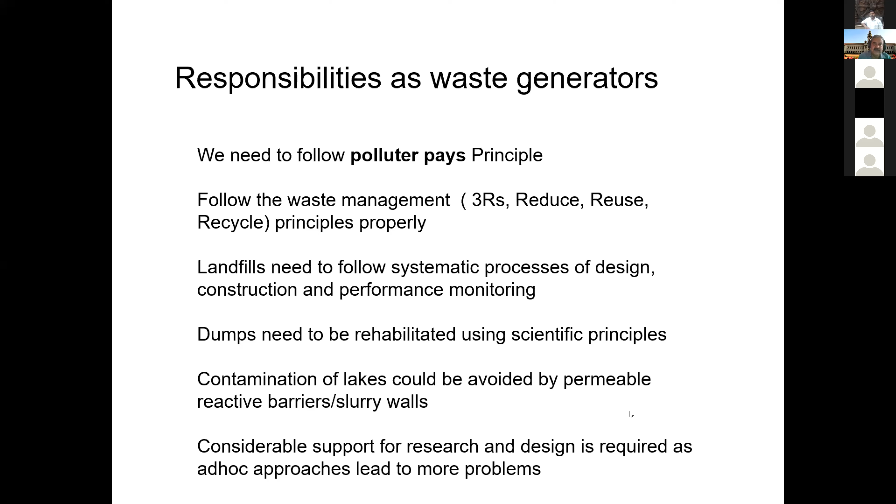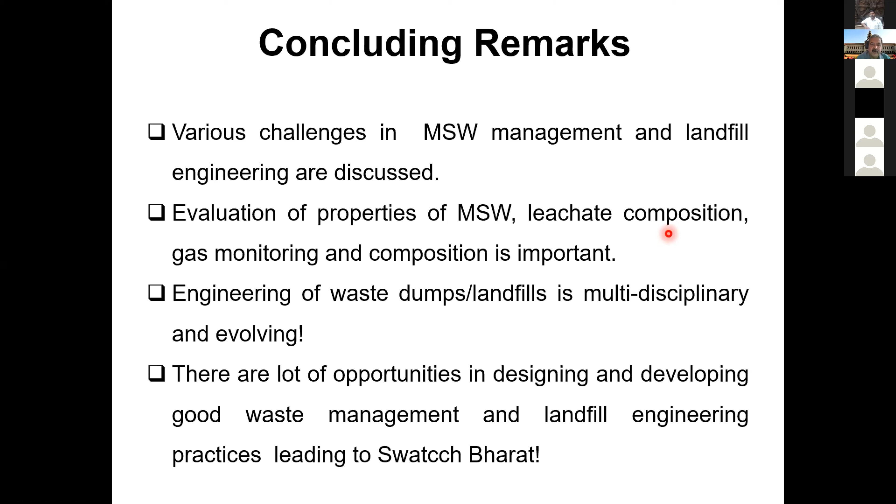As I just mentioned, we have a lot of challenges in landfill management, like property characterization, whether it is for MSW, gases, or even leachate to some extent. We have experts to talk about it. This is a multidisciplinary area, and there are very good articles and a lot of contributions on how different disciplines can address this and come out with nice options. There are a lot of opportunities for all of us to see that we have good practice of waste management. So thank you very much.

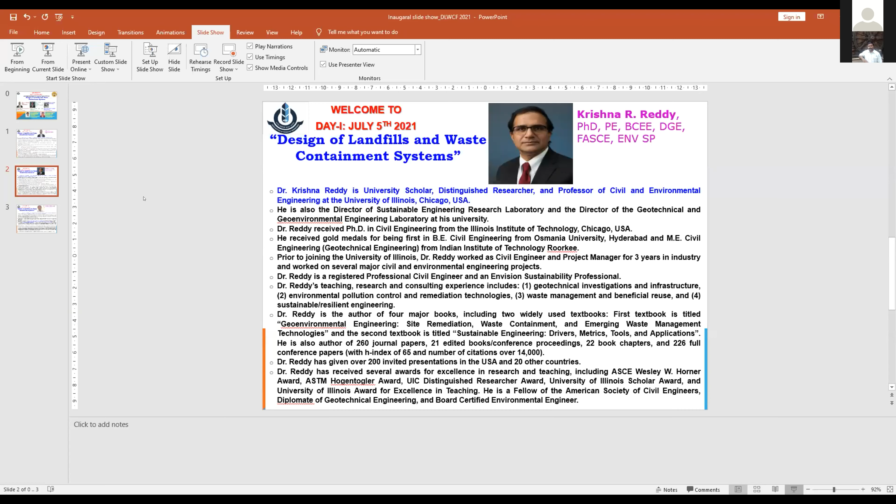Sir, my question is exactly that. In my study and in the literature review, I have seen that with higher dielectric constant, the permeability is lesser. As the dielectric constant goes down, the permeability increases. But the void ratio for 100% bentonite is more. Yeah, my suggestion would be we'll discuss it separately. This is a minor thing.